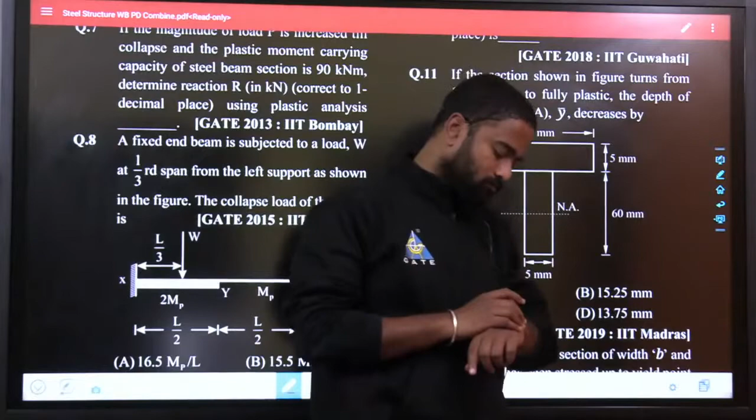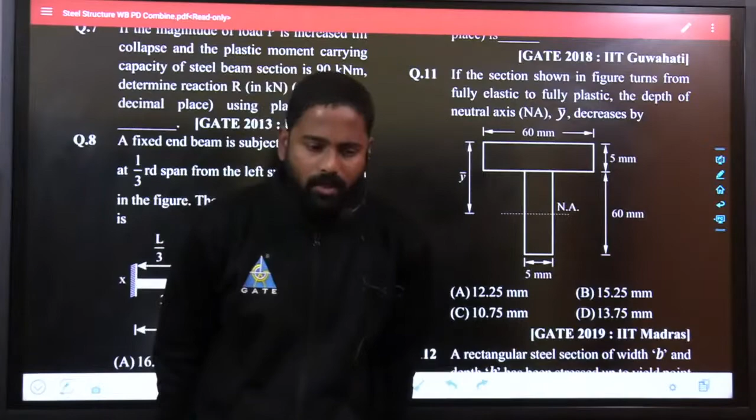So any doubts in yesterday's class, anything we can talk right now because people are not there. Before, I used to start class by 6 o'clock, but right now I started by 7 because it's winter. I think it would be difficult for you people to wake up, so I started at 7 o'clock. Any doubts, anything?

Yeah, this is the second lecture. There was some printing mistake, instead of 2 he kept 1 only, so there is some printing mistake. This is second class, yesterday it was first class in the steel and today it is the second class.

So what I can do, what you can do, matlab kya hai Rohit? Sorry, I didn't get what you can do means, solve the problems with me. That's what I can say.

So there is this mistake of design of steel structures 2. If it was 2, then people might have been watching. Since it is 1, people were not available.

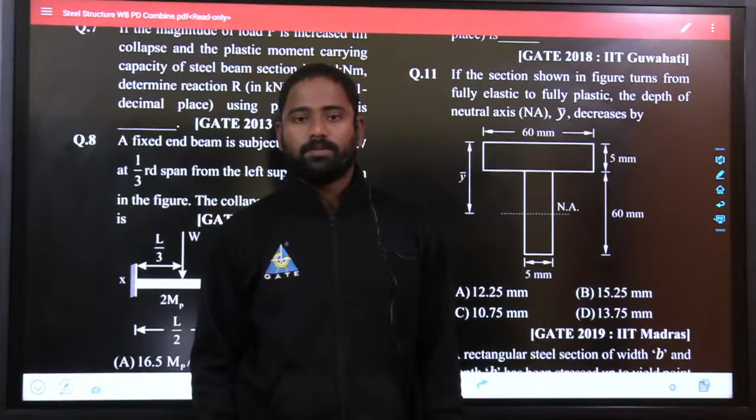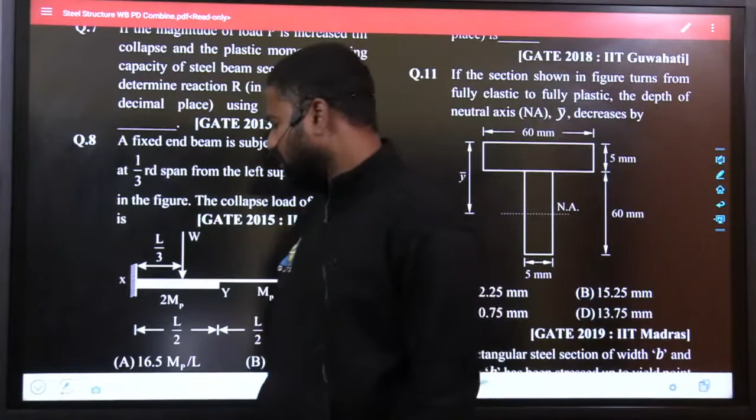Preparing steel design in short time. Reply me please. Follow the lectures right now I'm taking, so this will be helpful if you have not studied steel till now. This will give some basic idea of what to study, what not to study, and after that once again you revise this, I think it would be enough for steel. At least you will score 50% of marks.

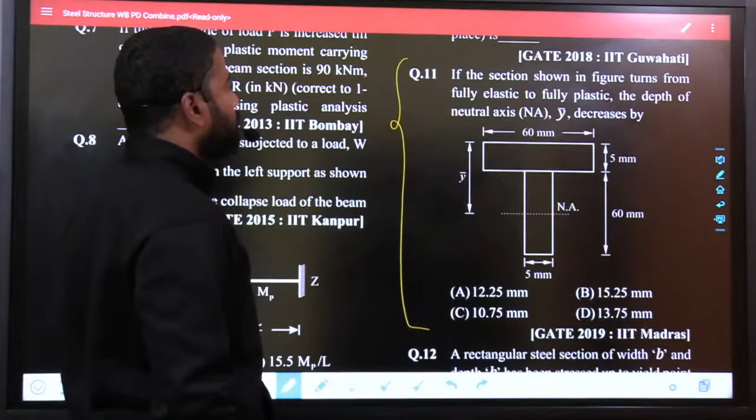Fine guys, so yesterday we were discussing something about shape factor, plastic neutral axis and elastic neutral axis, right? So based on that concept, let's solve one more question. This is your GATE 2019 question. The question given to you is, if the section shown in the figure turns from fully elastic to fully plastic, the depth of neutral axis y decreases by.

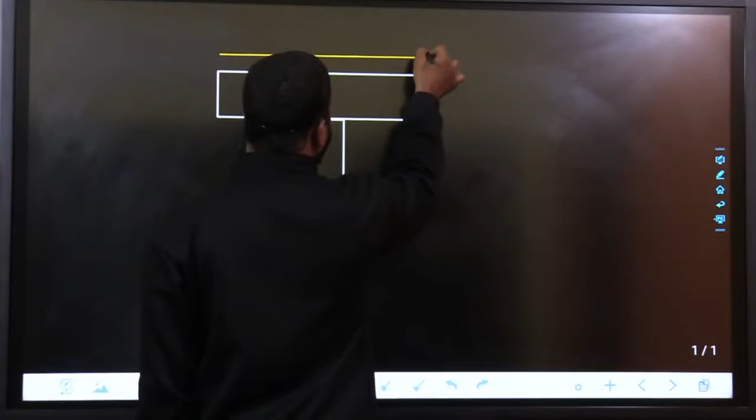This is 60 mm and this is 5 mm. Fine, this is 60 mm and this one is 5 mm.

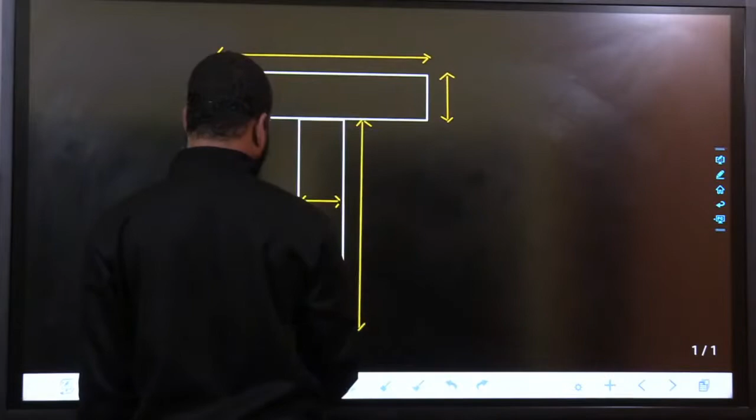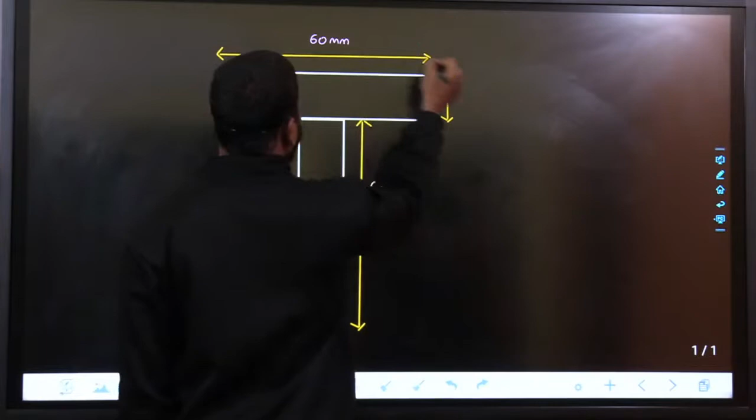The section shown in the figure turns from fully elastic to fully plastic. He is asking how the depth of neutral axis decreases by, that means find out plastic neutral axis and find out elastic neutral axis. Give me the answer.

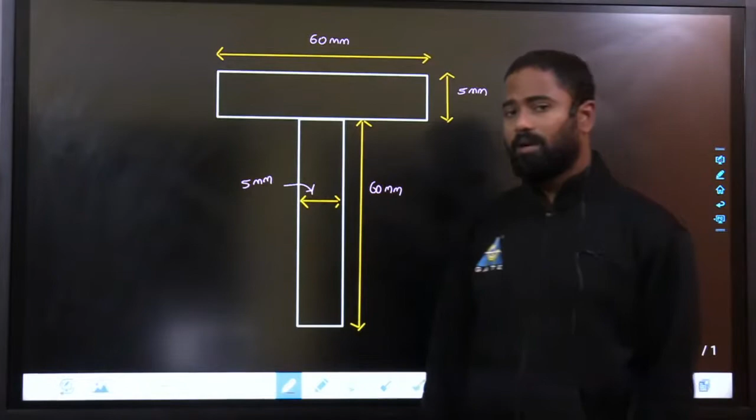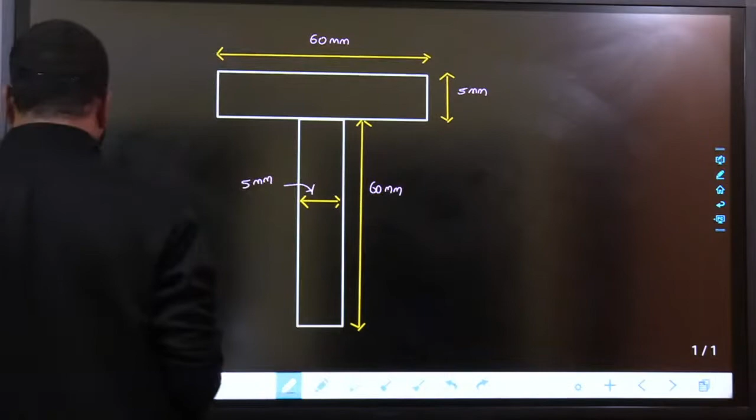Try to solve this question. Only 5 people are watching and 3 people liked. People are not liking me these days.

Of course it is difficult to wake up, I understand, but if you want something, you have to give up on something.

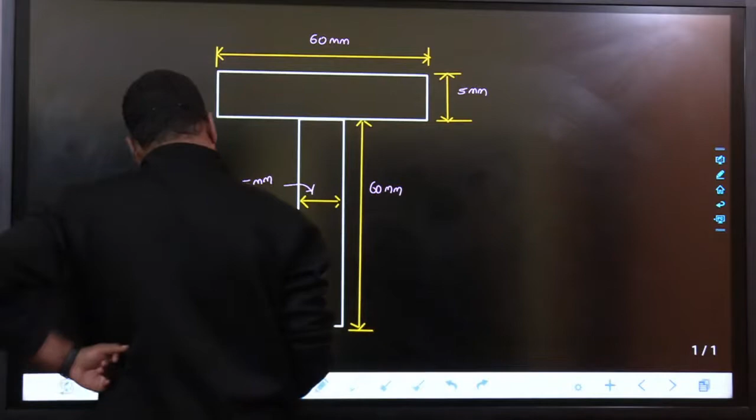I can't revise that, Rohit. It's okay, just go through yesterday's class, it is just some half hour of class, not a big issue.

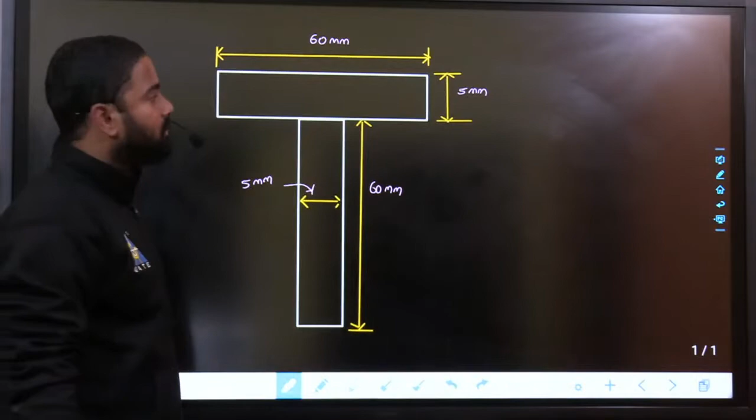Fine, so what is the answer, guys? How much amount y decreases? The depth of neutral axis decreases. First one is to find out the neutral axis or elastic neutral axis, that would be equal to centroid. Elastic neutral axis, that is equal to centroid.

How are you going to find that out? Let us say elastic neutral axis is at a distance of x from the top. So centroidal distance x would be equal to...

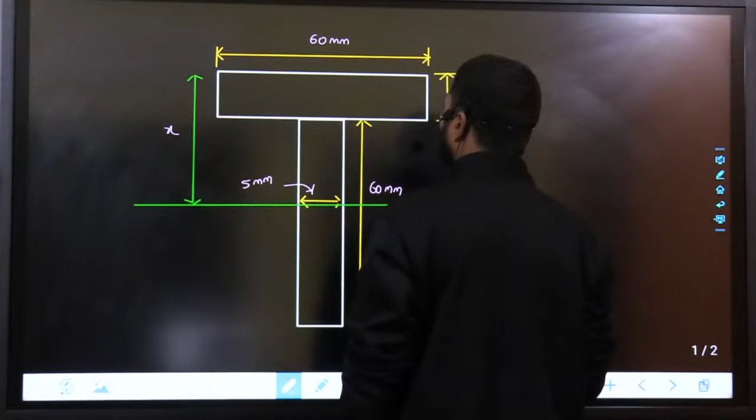For x I'll use y bar. This is elastic neutral axis. 60 into 5, from the top centroid is 2.5, and for this one is 60 multiplied with y minus 5. From the top centroid would be 5 plus y minus 5 by 2, right?

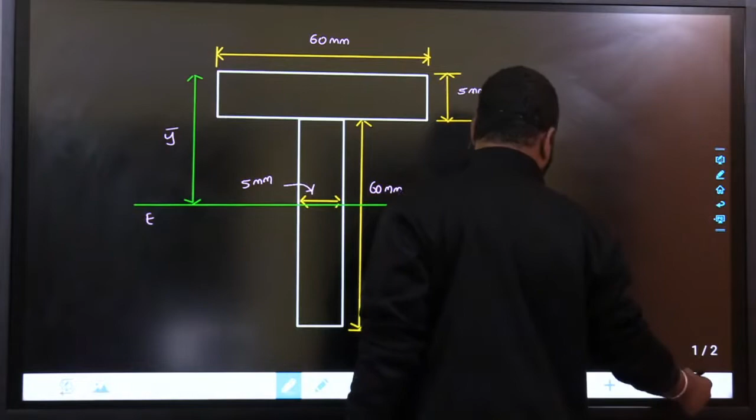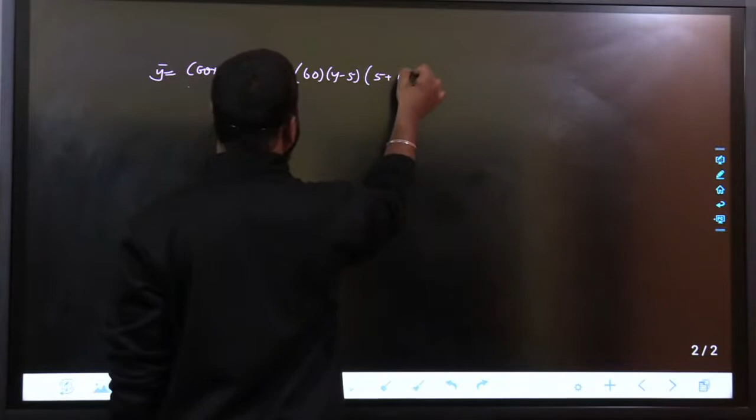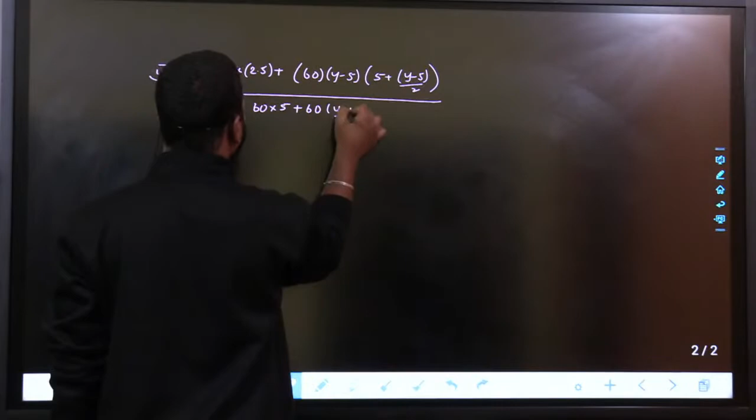Y bar equals to 60 multiplied with 5, from the top it is 2.5. Centroid a1 y1 plus a2 y2, 60 multiplied with y minus 5, from the top centroid is 5 plus y minus 5 upon 2, whole thing upon area. Area is 60 multiplied with 5 plus 60 multiplied with y minus 5. Right? Centroidal distance you have to calculate from the top.

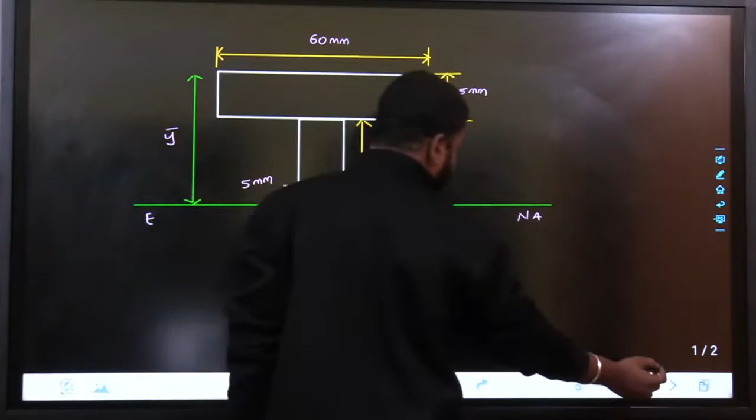Sorry, I think I am also sleeping. Very good morning guys.

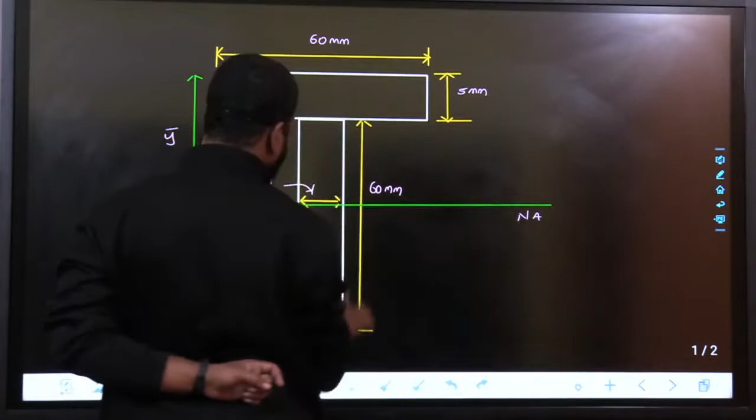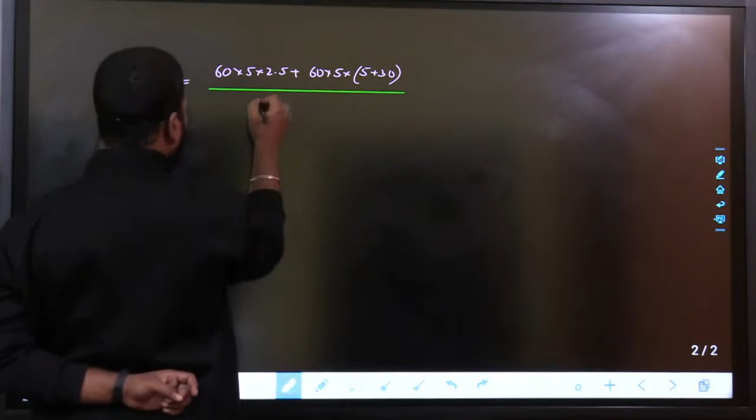Y bar centered, how will you calculate? 60 multiplied with 5 multiplied with 2.5 for this area, and for this area it is 60 multiplied with 5, from top it is 5 plus 30. So centroidal distance y bar equals 60 multiplied with 5 multiplied with 2.5 plus 60 multiplied with 5, whole area multiplied with 5 plus 30, that is 35, whole thing upon 2 times 60 multiplied with 5, that is equals to 2.5 plus 35 upon 2, 37.5 upon 2, the value equals to

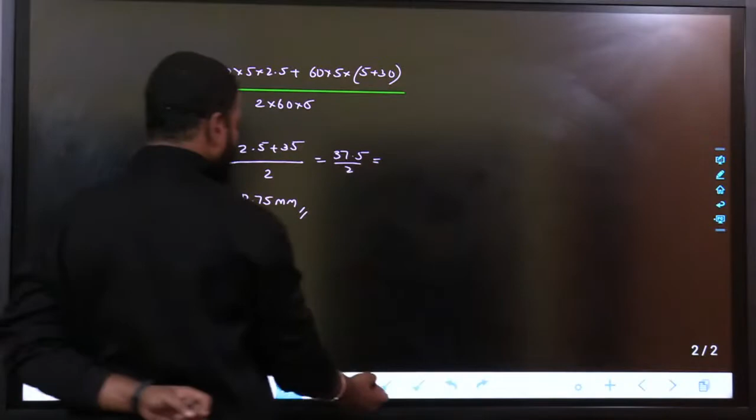18.75 mm. Y bar equals to 18.75 mm. Y bar is 18.75 mm.

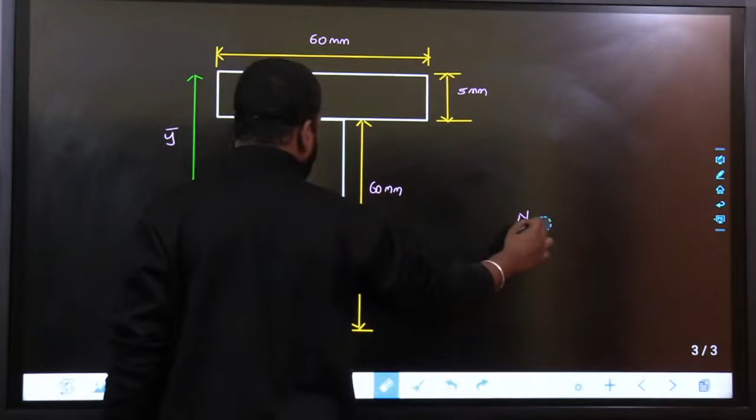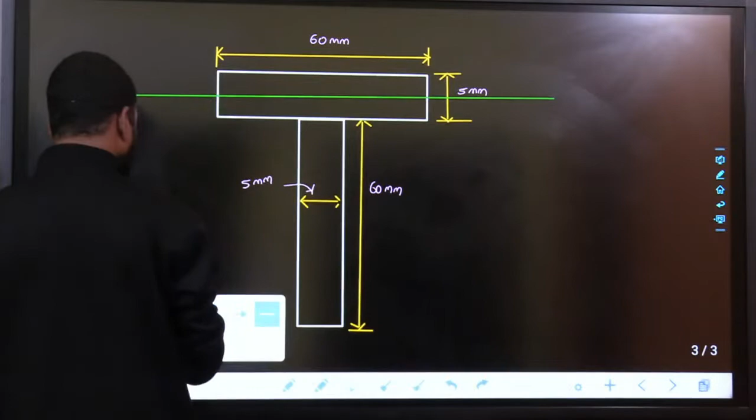This is depth of equal area axis, not equal area axis, elastic neutral axis. Next one is to find out depth of equal area axis, that is plastic neutral axis. From symmetry you can see that plastic neutral axis will be exactly here, because that is equal area axis, plastic neutral axis. How you are going to find out? Let us say this is at a distance of, let us say I don't know where is plastic neutral axis. I assume some distance at a distance of y bar, some y, I have to find out plastic neutral axis, equal area axis.

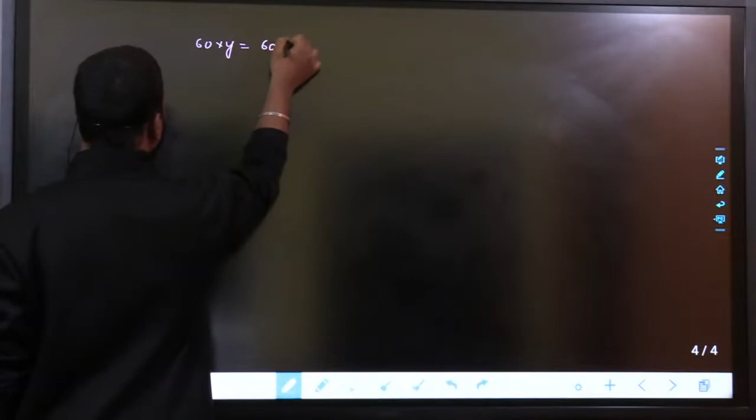That means area above this must be equal to area below this, that is 60 into y. If I have to write the area above this, 60 into y equals to 60 multiplied with 5 minus y plus 60 multiplied with 5. Area above this is 60 multiplied with y, area below this 60 multiplied with 5 minus y, and this whole area is 60 into 5. So 60 into y plus 60 into y equals to 60 into 5 plus 60 into 5. So y equals to 5 mm.

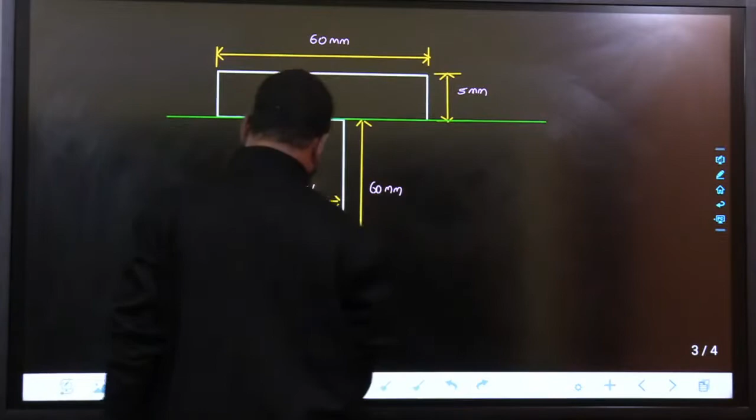That's what I said. From symmetry also you can directly see that y equals to 5 mm means your plastic neutral axis would be exactly here. This is plastic neutral axis. Your plastic neutral axis will be exactly here, that is 5 mm, and elastic neutral axis equals to 18.75 mm.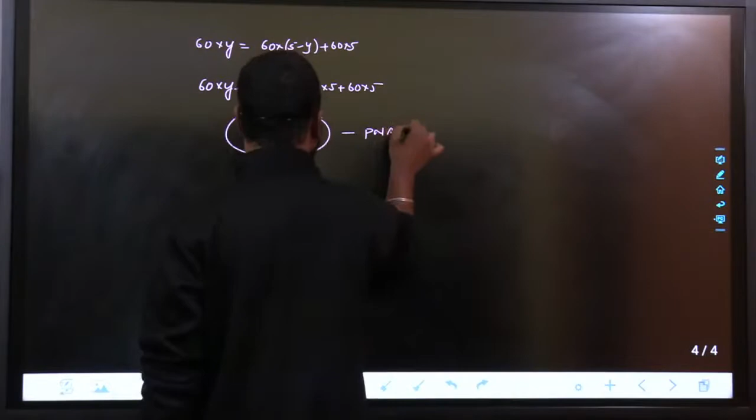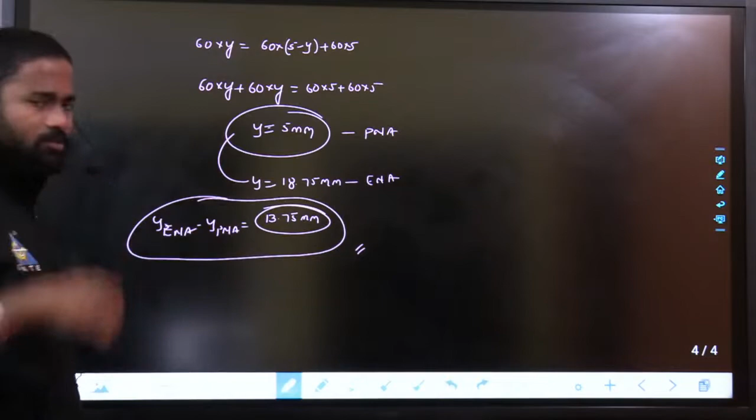The difference between elastic neutral axis and plastic neutral axis, this is plastic neutral axis, and y equals to 18.75 mm, this is elastic neutral axis. The difference between these two things is 13.75 mm. So that is the meaning of it. He is asking this difference, y of elastic neutral axis minus y of plastic neutral axis, 13.75 mm. Very simple question. Fine. So any doubts in this?

Any doubts in this? Only 4 people are watching. Where are the other guys? Sleeping?

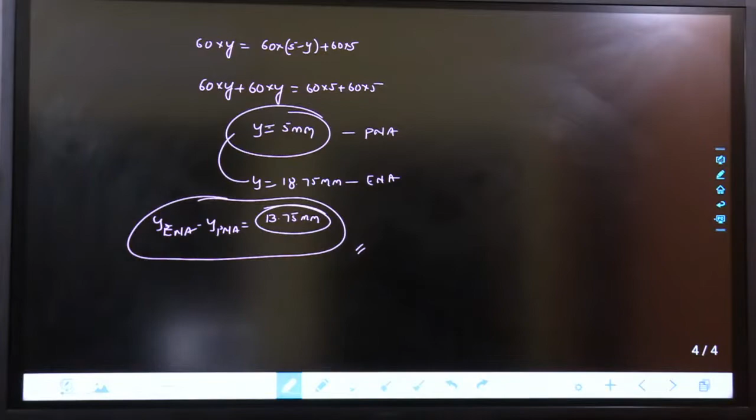Rohit, this is the basic concept. Plastic analysis, we try to find out plastic neutral axis, and in elastic analysis we try to find out centroidal axis. So centroidal axis y bar is 18.75 mm and plastic neutral axis is at a distance of 5 mm, the difference is 13.75 mm. This is your gate 2 marks question. Gate question, 2 marks question. Basics are very much important.

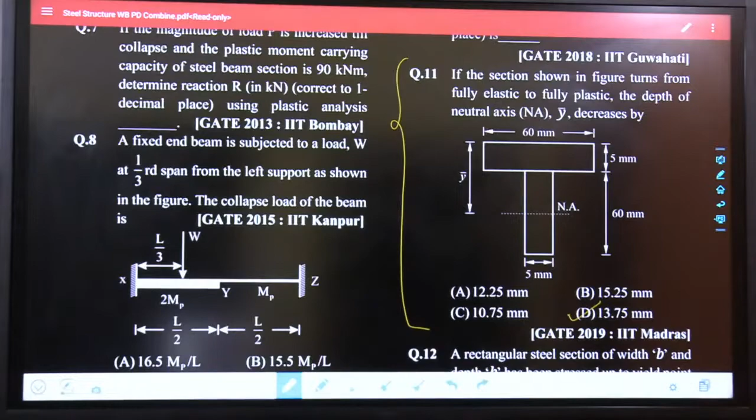So anyone who is active right now? Only Rohit is active. 5 people are watching. Pradeep, he said good morning. I think he is busy with something else. No one is there. Venkat Kalyan said good morning, and after that he left. What happened, guys? I don't see that much enthusiasm or that much crowd over here.

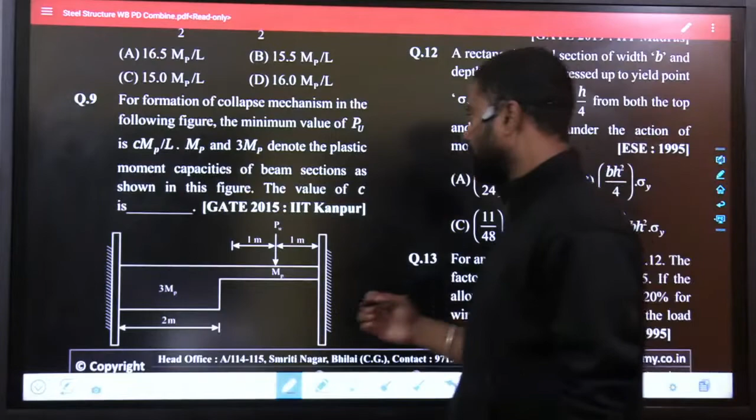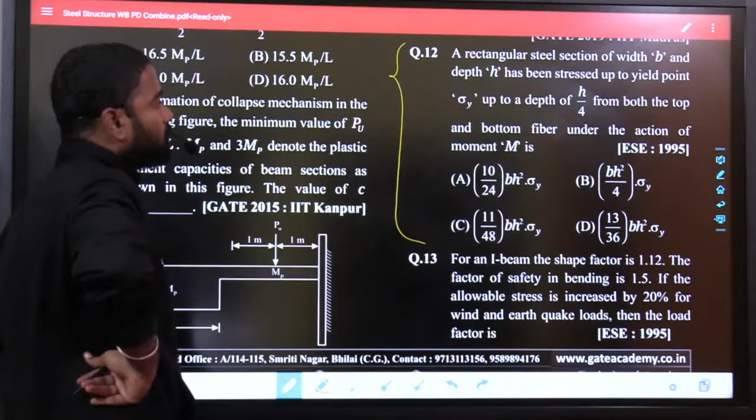Anyway, next question is a rectangular steel section of width b and depth h has been stressed up to yield point up to a depth of h by 4 from the bottom, from both top and bottom fiber under the action of moment m. He is asking what is the moment m.

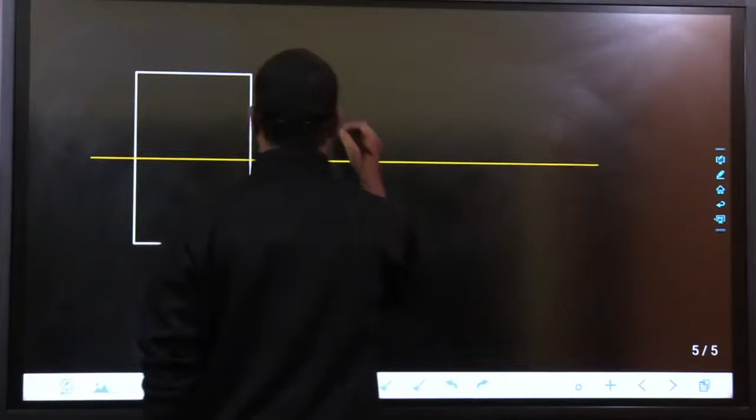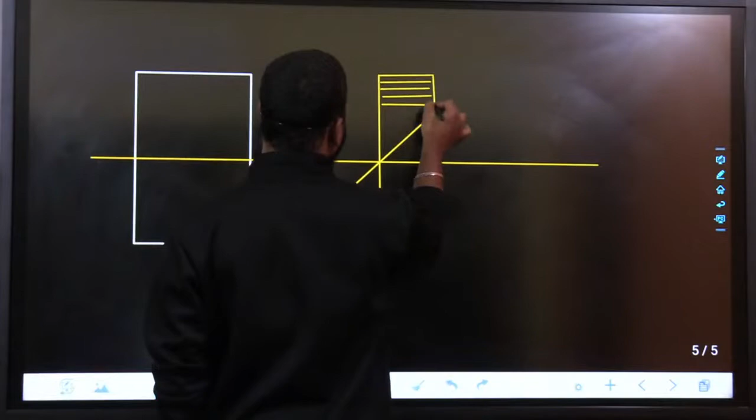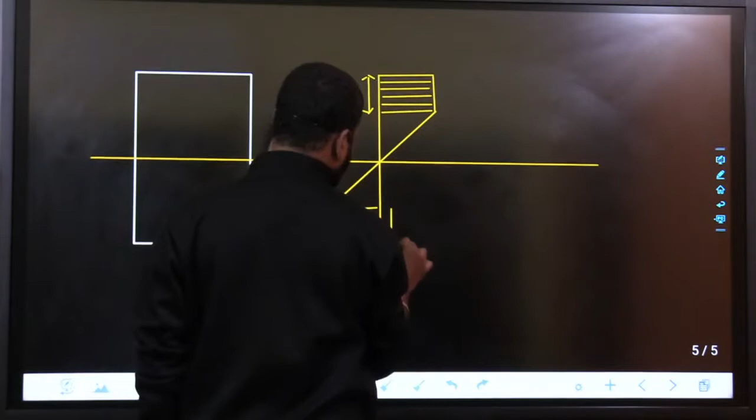I think this is an engineering services question. Engineering services questions, calculators are not allowed. Remember that. There is a rectangular section, fine, and what he is saying is stressed up to sigma y from h by 4 from both top and bottom. Okay, from here up to a distance of h by 4 it is stressed up to sigma y, up to a distance of h by 4 it is stressed up to sigma y.

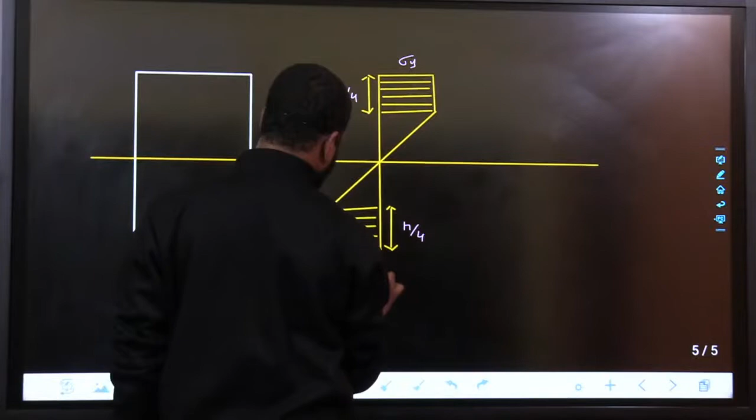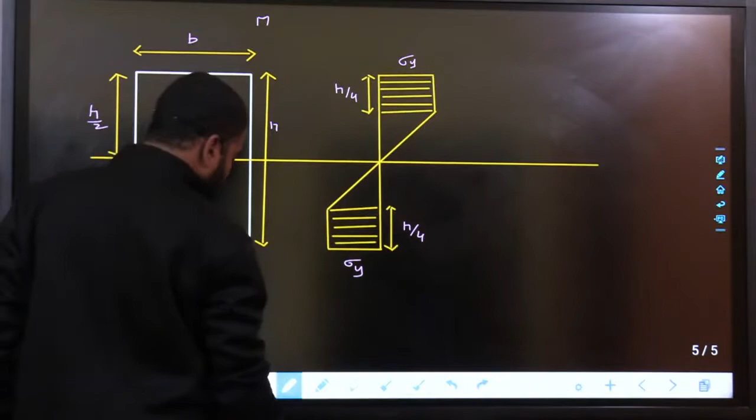Fine, this is h upon 4, this is also h upon 4, this is sigma y, this is also sigma y. Under the action of some moment m, it is stressed up to sigma y. And what is the dimensions? B by h. This is b, this is h. Generally the depth of neutral axis will be at a distance of h by 2. This is h by 2, this is h, this is b. He is asking what is the value of moment m. Please tell me the value of moment m. How you are going to find out? Give me the answer. Only 2 people are watching.

Even Rohit left, I think.

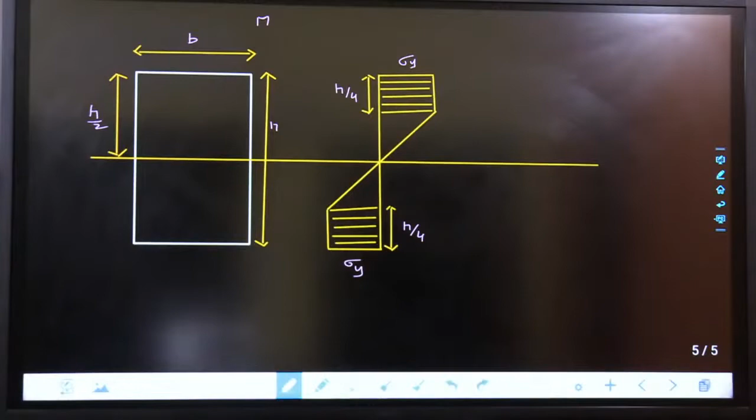Everything is a different experience. Anyway, so here what I can say is you have to calculate moment M.

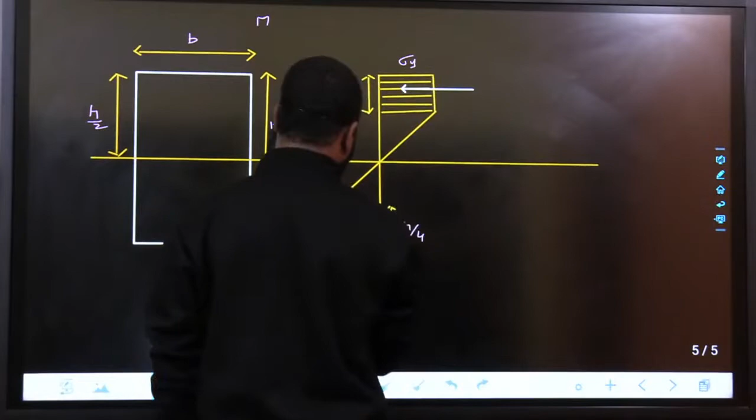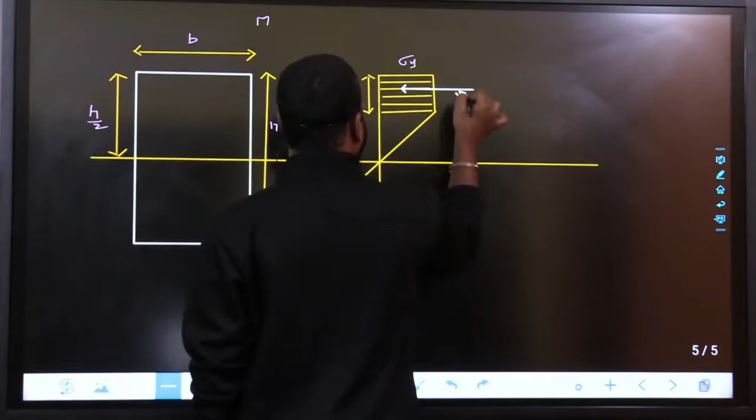So some part is subjected to full stress. That means some part is plastic and some part is in elastic region.

If I take this as the tension, this as the compression, only for this small part, this part is in plastic region, this part is in elastic region. So what would be the depth of this part?

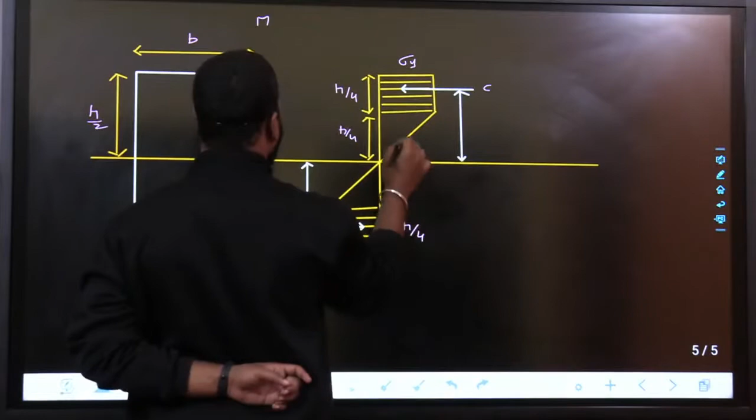This is h by 4, this is also h by 4. H by 4, h by 4. That means up to a depth of h by 2.

This behaves like a beam under elastic zone. So moment due to this, generally M equals to M1 plus M2.

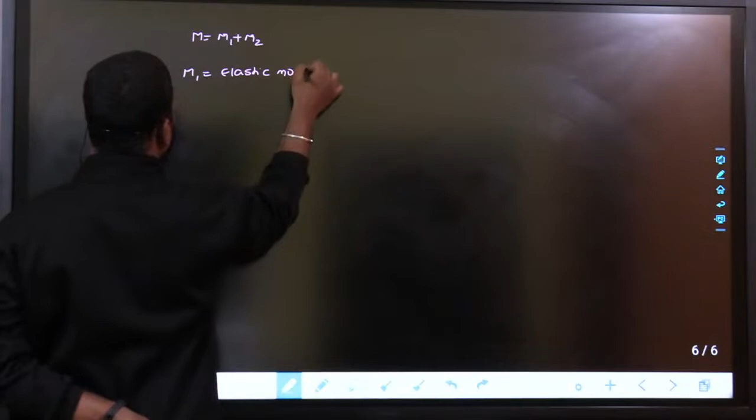Here I'll write M1 is elastic moment, that is Fy multiplied with Z. Z you have to calculate for a beam of depth h by 2.

That means Fy multiplied with, generally for rectangular section it is BD square by 6, B multiplied with h by 2 whole square upon 6. So this is Fy multiplied with BH square upon 24. This is M1, elastic bending moment.

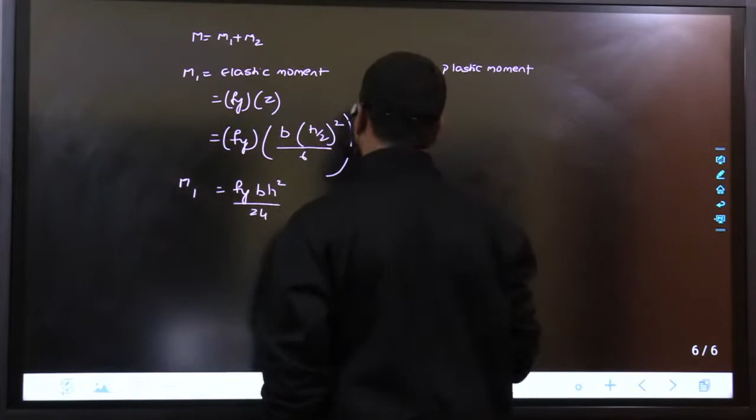M2, that is plastic moment. So in plastic moment what you will write is compression, tension, multiplied with lever arm. So how will you find out lever arm?

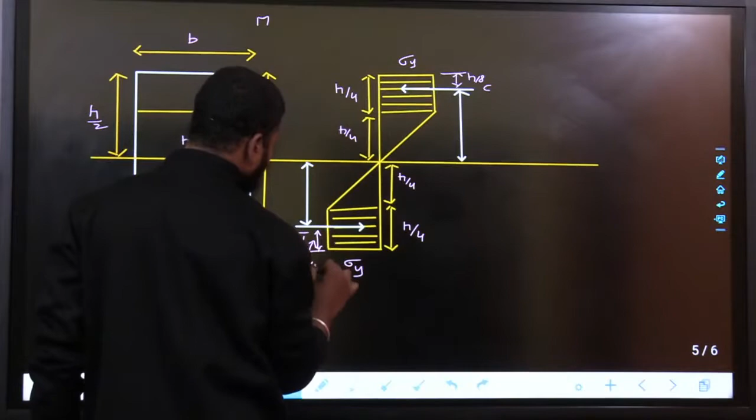If this is h by 4, lever arm would be at a distance of h by 8. This is h by 8, this will also be h by 8. I mean the centroid will be at a distance of h by 8. So overall lever arm would be equals to

h minus 2 times h by 8. So compression multiplied with lever arm, or tension multiplied with lever arm.

So compressive force, that is sigma y or Fy, multiplied with B multiplied with h by 4. That is equals to tensile force. So sigma y multiplied with h multiplied with B by 4.

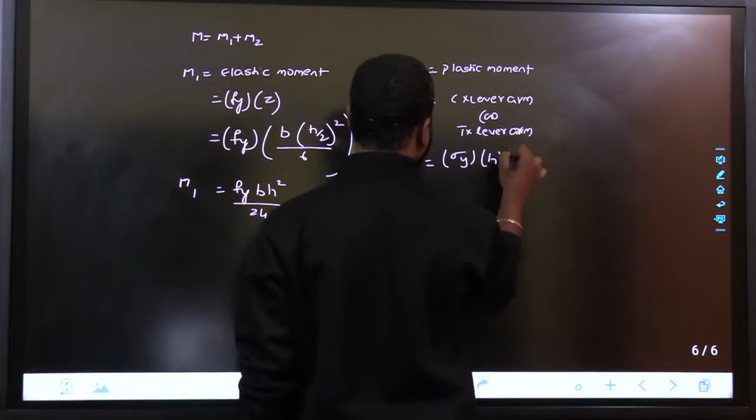B multiplied with h by 4, multiplied with B multiplied with h by 4, multiplied with lever arm. Lever arm is h minus 2 times h by 8. So sigma y multiplied with B multiplied with h by 4 multiplied with 3h by 4. So 3bh square upon 16 multiplied with sigma y.

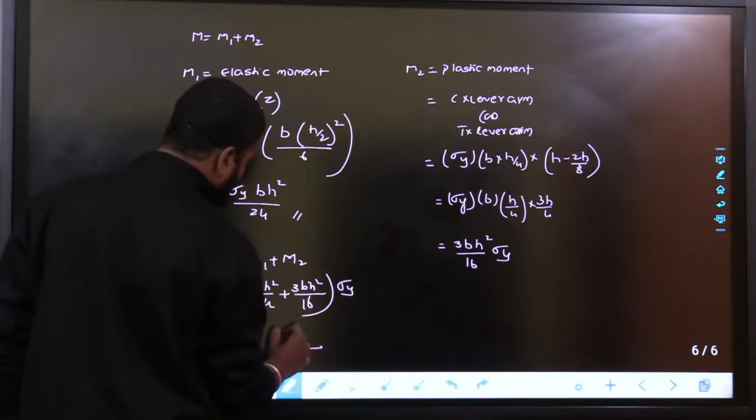And this is also, I'll write this as sigma y so that you don't get confused. So overall moment M equals to M1 plus M2, that is bh square upon 24 plus 3bh square upon 16, multiplied with sigma y. If I take this as 48, 2 plus 9, 11 bh square upon 48 sigma y.

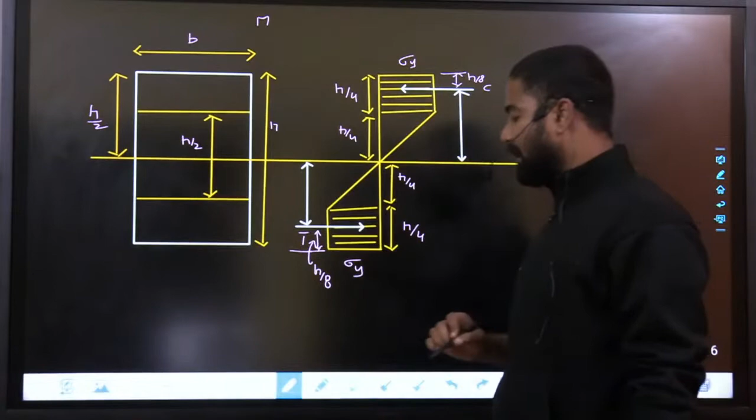That is the moment M. Under this moment, up to h by 4 from top and bottom, it is subjected to sigma y, and rest of the things will be in elastic zone.

Any doubts? Hey Prachi, good morning. Rajnath Patel, good morning. It's not Prachi, sorry, it's Rajnath Patel. Good morning, good morning, good morning, good morning.

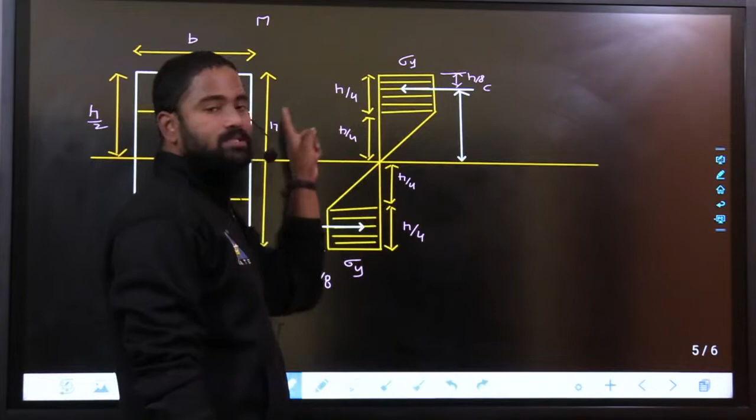This is how you solve it. So first, what he is saying is, up to a depth of h by 4 it is stressed up to sigma y, and this will be generally in the elastic zone. So this is in elastic zone.

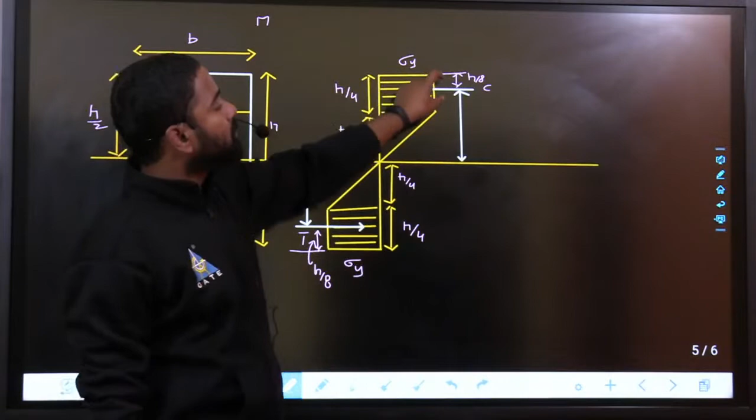Total moment would be equals to elastic moment plus plastic moment. So for plastic moment you have to find out C multiplied with lever arm, whereas for elastic moment it is this moment plus this moment. For elastic moment it would be M1 plus, f sigma y multiplied with Z, that is bd square upon 6.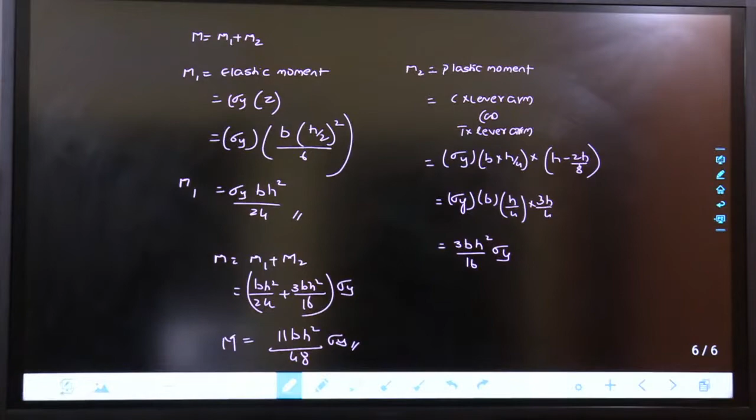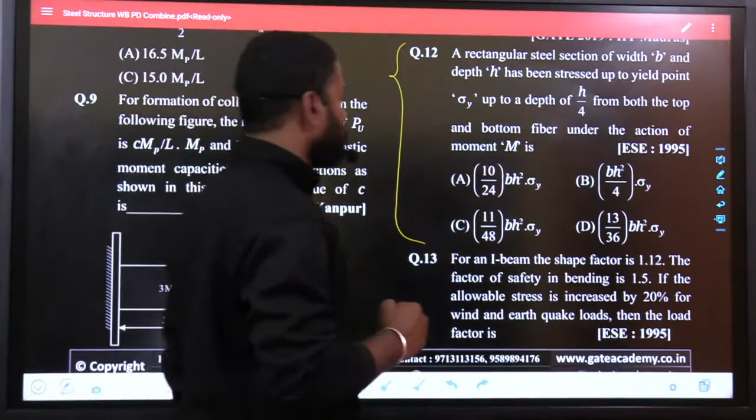So overall it is the value of moment 11 bh square upon 48 sigma y. Any doubts? I think there is no one to ask doubts. Some mistake has happened. 11 bh square sigma y upon 48 sigma y, that is question number.